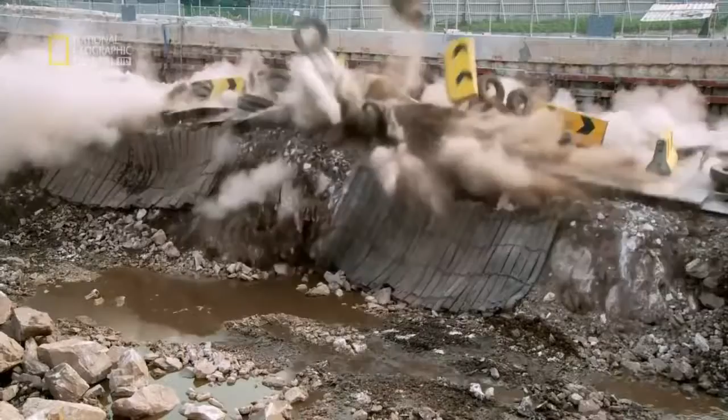Now there's an ambitious solution: a new transit system that will crisscross not only the city, but the entire region of Greater Kuala Lumpur. Huge machines will bore into Kuala Lumpur's treacherous bedrock to carve out almost 20 kilometers of tunnel. Every day of construction, the engineers confront the perils of mechanical failure, fire, and collapse. Get it wrong and billions of dollars of investment could go to waste, and the streets of Kuala Lumpur and its pent-up economy will stay trapped in gridlock.

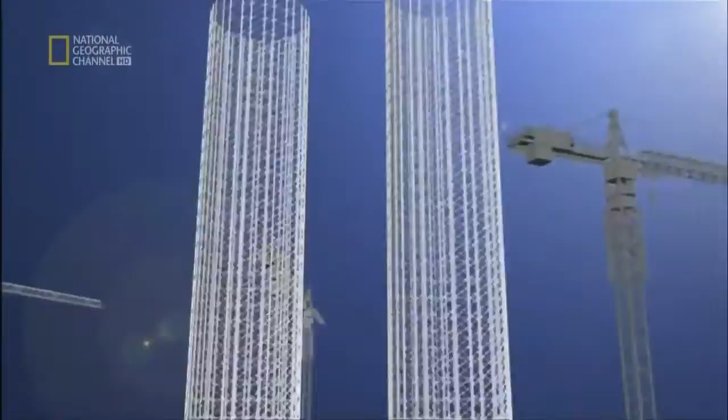Kuala Lumpur is one of Asia's most vibrant cities. It's looking to compete with the region's Asian tiger economies. Its magnificent skyline testifies to its soaring ambition. But at street level, it's a different story. The city is blighted by severe congestion that threatens its future growth.

Over 7 million people live and work in the Kuala Lumpur region, the Klang Valley. Every day, they head into town in 4 million cars. As an alternative, a light rail transit system was built. But over time, it has been overwhelmed, and connections are inadequate.

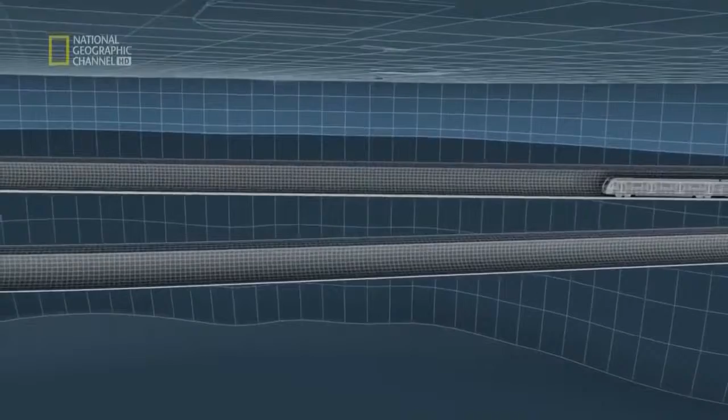Now there's a solution, a new mass rapid transit system that will reduce the pressure on traffic and unite far-flung parts of the city. For any modern metropolis to be vibrant, to be competitive, to be on par with some of the leading cities in the world, you've got to have a modern public transport system.

The Klang Valley Mass Rapid Transit System, the KVMRT, is Kuala Lumpur's bid for greatness. 3 different routes comprising more than 150 kilometers of brand new lines. It will be seamless travel around the Klang Valley, especially the areas of high concentration population.

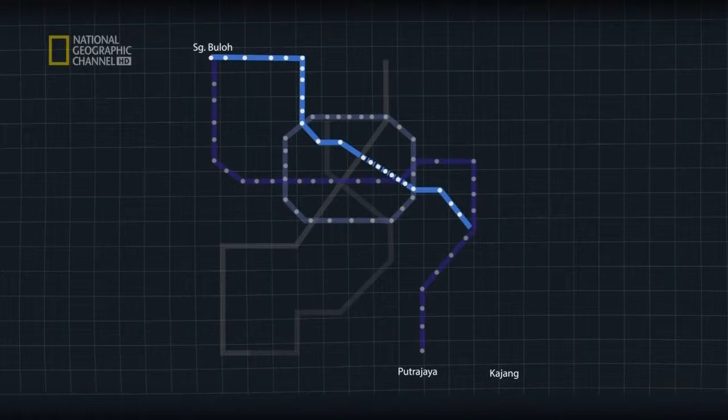And the first stage of the plan is the biggest test of all. This is the Sungai Buloh Kajang line. It will stretch 51 kilometers with 31 new stations. A fifth of the new line will have to be constructed underground. To do this, 10 giant tunnel boring machines, or TBMs, will be brought to Kuala Lumpur and set to work.

These mighty engines do much more than burrow through rock, astonishing though that process is. As the huge drill crunches forward, the back end constructs the tough tunnel frame with high-strength concrete.

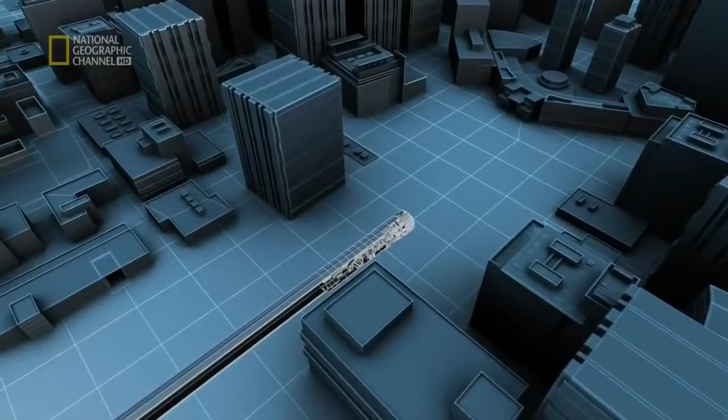In charge of this massive operation is engineering veteran Satpal Bogal. Most cities now, for railway mass transit systems, the tunnels are built using TBMs because of safety issues and because of ground conditions. The underground section of the new MRT will be a perilous undertaking.

For beneath Kuala Lumpur is a formidable engineering challenge. Below the city are 2 very different kinds of rock, and the TBMs will have to deal with both. The western area is known as Kenny Hill, and the eastern area as the Kuala Lumpur limestone. Imagine the difference between a Dutch Edam and a Swiss cheese riddled with holes.

Dr. Ooi Lean Hock is the project geologist and expert on Kuala Lumpur's underground world. I got this Dutch Edam cheese here. As you can see, this whole piece of cheese is fairly homogeneous, very tight. And Kenny Hill, when it's bedded, it looks something like this. This is like the KL limestone. All right, this is Swiss cheese.

As you can see, there are a lot of cavities and voids inside the cheese. These voids can be transmitted all the way to the other side of the cheese. Things can move in from one hole to another hole, and it may come in vertically and go out laterally.

The most formidable challenge lies beneath the eastern areas of Kuala Lumpur, which rest on a huge slab of limestone. Over millions of years, torrents of acidic rainwater have eaten away the layers of rock to sculpt a hidden landscape of pinnacles, cavities, interconnected passageways, and colossal caves.

Around me here on my left is a surface karst, or a limestone hill, you can say. Now imagine when we are underground and all these are covered with soil, it is totally a different ball game. So when you tunnel through this kind of material, there are a lot of unforeseen circumstances which would be a nightmare for tunneling.

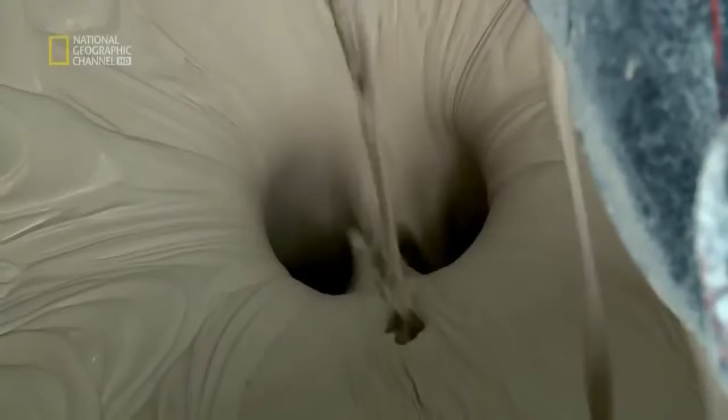This is the worst nightmare of all. The drill head hits weak cavities and the rock caves in on the cutter head. The solution is this stuff, slurry. At the head of the drill is a high-pressure chamber that injects a liquid called bentonite slurry into the cavities before they can collapse.

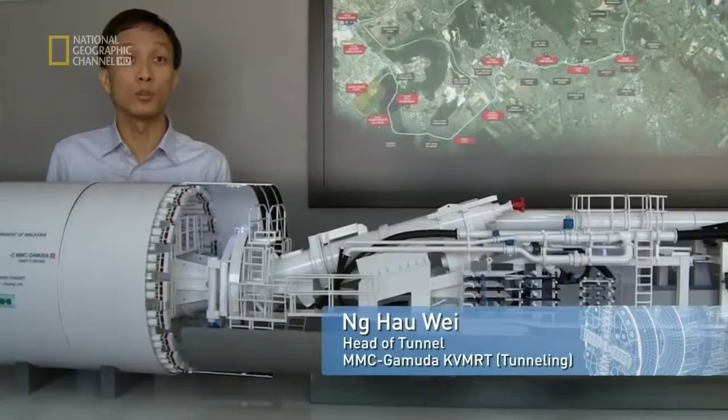This ingenious system was used by the engineers who built the Smart Tunnel in Kuala Lumpur, the world's first combined storm and traffic tunnel. But builders learned some hard lessons about slurry. Ng Hau Wei was a rookie engineer on this project. We have the best machines in the world in the SMART project, but we still do have some problems.

What Ng and the engineering team found, to their cost, was that the slurry they injected into the limestone cavities could escape into surrounding rocks and cause havoc, bursting from the ground like a geyser or creating sinkholes at the surface that might suck in people, cars, or buildings.

Today, Ng heads the tunnel team building Kuala Lumpur's MRT system. And this time, he had to find a solution to the uncontrollable slurry problem.

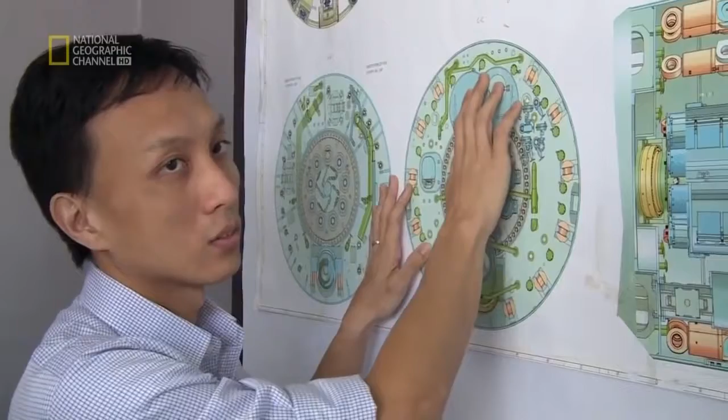Working with German company Herrenknecht, Ng and the team of engineers have come up with a revolutionary kind of machine. We throw in all the ideas, we have brainstorming sessions, we consult a lot of experts, we have to do a lot of research because no machine has been designed like this before.

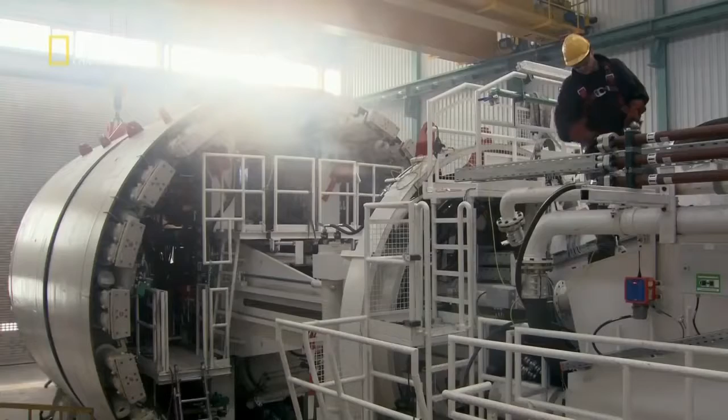From these brainstorming sessions was born this mighty machine. Called the Variable Density Machine, it's the state-of-the-art tunneler. For the first time, a TBM can control the consistency of the slurry and take on whatever Kuala Lumpur's underground throws at it. Even the construction of this revolutionary machine is on an epic scale.

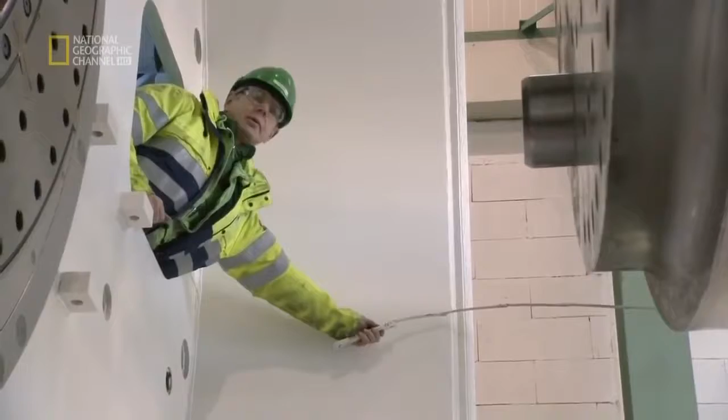Components are brought from all over Europe to be assembled inside the massive factory in Schwanau in Germany and other Herrenknecht plants in China. One machine like this is fiddled together, you can say the machine is fiddled together with about 40,000 pieces one by one.

The design starts screw by screw, piece by piece, and this is brought together with all our 400 engineers. They do all these works to come to this level, what you can see today.

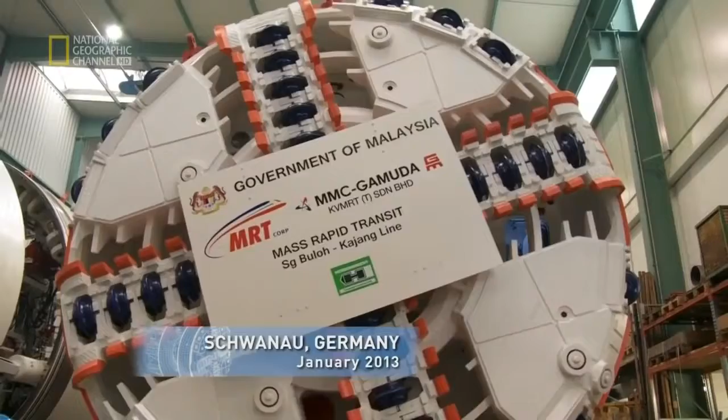It takes 9 months to manufacture the revolutionary TBM. Today, it's ready to be put through its paces. We have only seen it on the drawing board so far. So this is the first time that it is all put together.

Everything is running, so we can check every equipment, including the cutter heads, the hydraulics, the safety features. This is the last chance for us to make final modifications before we send it to the site and put it in the ground.

As the engineers work on the TBMs in Germany, work gets underway in Kuala Lumpur. The engineering company in charge of tunneling, MMC Gamuda KVMRT, must complete the job in 24 months and with minimum disruption to the city above.

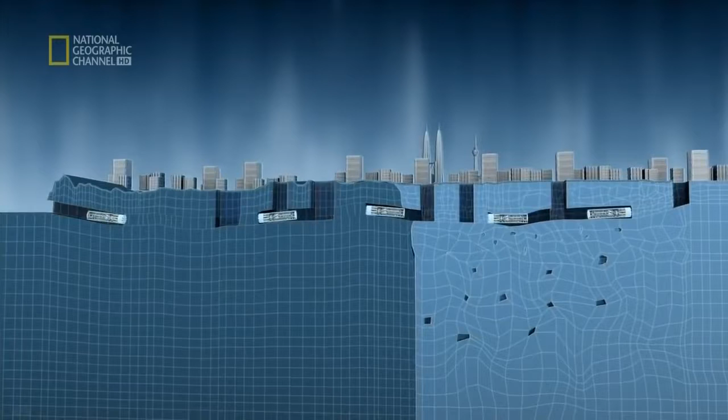The operation is conceived on a military scale and with military precision. The TBMs will be launched from 4 different staging zones along the planned route of the underground section of the MRT. At the western end of the tunnel, the elevated section of the MRT begins its descent underground from the surface. But at the 3 other zones, shafts must be excavated so that the different TBMs can be put to work beneath the city. Eventually, the different sections of the 9.5-kilometer tunnel must all link together.

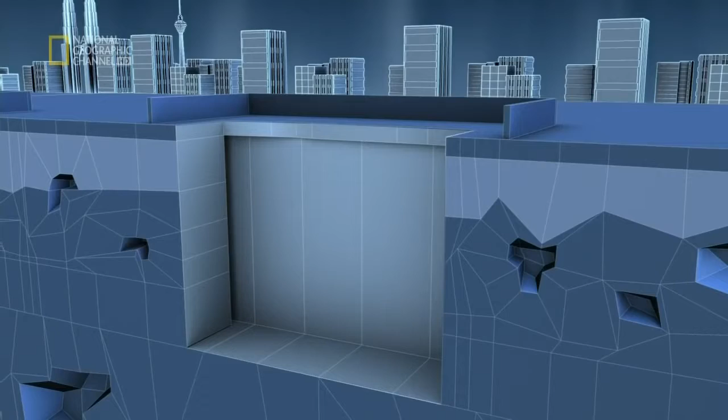Since July 2011, work on Kuala Lumpur's new MRT starts here at the Cochrane site. It must be dug out to a depth of 30 meters before 4 TBMs can be deployed. The huge staging zones will be blasted out of the ground.

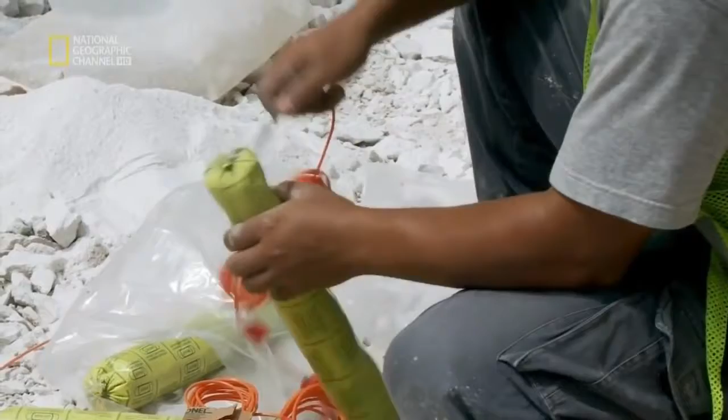We have short time to meet our requirements, so we are working with frequent blasts, more than 2 or 3 blasts a day. The blasting must be carried out with rigorous precision, especially in a city as dense as Kuala Lumpur. So when you talk about blasting itself, it's dangerous.

You can see we've been surrounded by high-rise buildings. Now at the moment you're using about 150 to 200 kg. So that can bring a 10-story building down.

The solution is to sequence each blast, creating a pressure wave that, in theory, won't damage surrounding buildings. These are the basic things we use. My hand now is explosive, which will be charged to the detonators over here, and it will be connected one at a time, and finally we have delays. This will segregate the blasting rather than at one go.

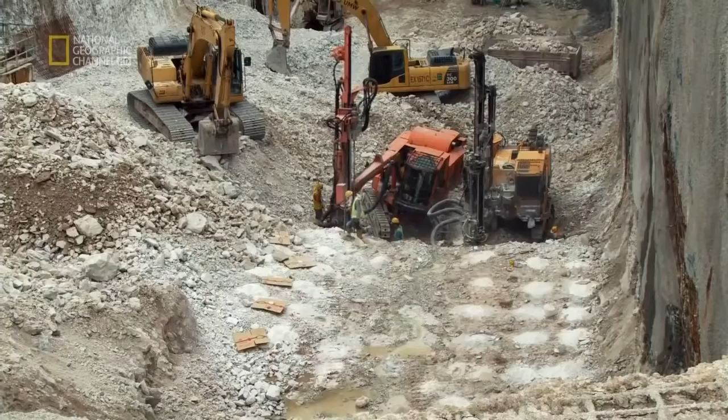Engineers dig rows of holes between 3 to 6 meters deep. Then the explosive charge is inserted inside with a detonator. These are connected to a central command point. But nothing is left to chance. Giant barriers of steel plates, truck tires, and concrete prevent debris flying from the site. The charges are set.

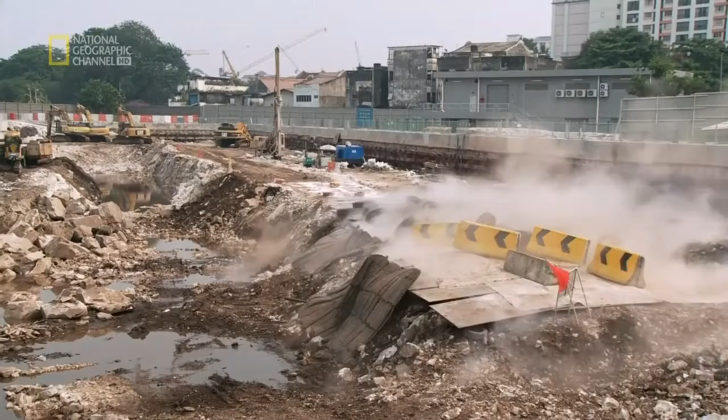The engineers have got the right formula, and the surrounding buildings are safe. The blasting continues at the Cochrane site for 7 explosive months. Enough rock and soil to fill 50 Olympic-sized swimming pools is blown out of the ground. And finally, the site is ready to receive the first TBM.

Its code name, 774. At the beginning of 2013, the first new model arrives in Kuala Lumpur. The giant machine is transported in parts to the Cochrane site on huge lorries.

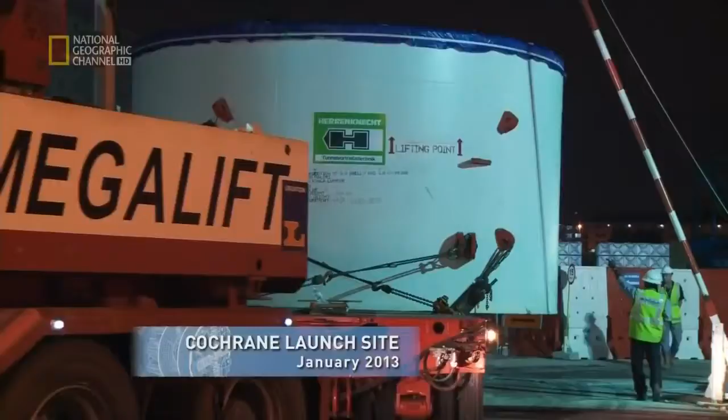But that's the simple part. Now the 160-ton monster must be lowered into the excavated shaft so that they can start chewing into bedrock. To lift it 30 meters down the shaft, we have to be very careful. Anything can go wrong and then we are stuck. It will push back the whole project completion by a lot.

At the site, everyone is holding their breath as the TBM begins its descent underground.

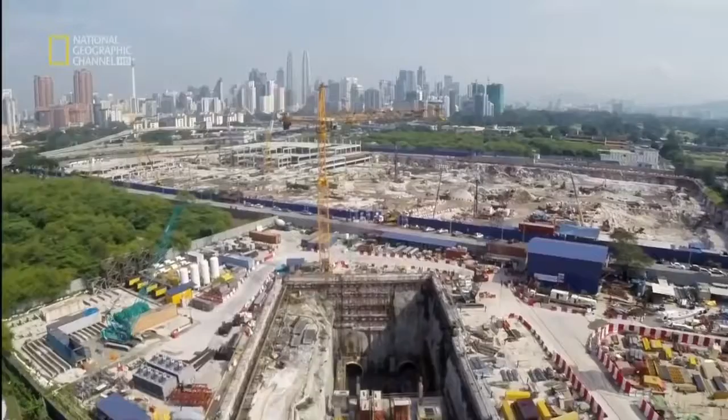Malaysia's capital, Kuala Lumpur, is being transformed into a huge building site. A new MRT system is under construction. Close to 10 kilometers will be built beneath the city, and a revolutionary new tunnel boring machine, or TBM, is brought from Germany. The first to be sent into action weighs 160 tons and has to be delicately lowered 30 meters to the tunnel entrance.

The man in charge of the tunnel operation is Ng Hao Wei. He won his spurs building Kuala Lumpur's famous Smart Tunnel. We are dealing with very delicate components, and we cannot afford to damage it. If the extent of damage is huge, then the impact to the project will be tremendous.

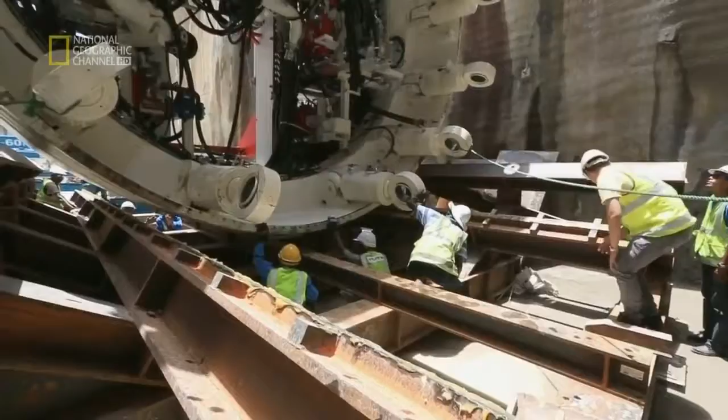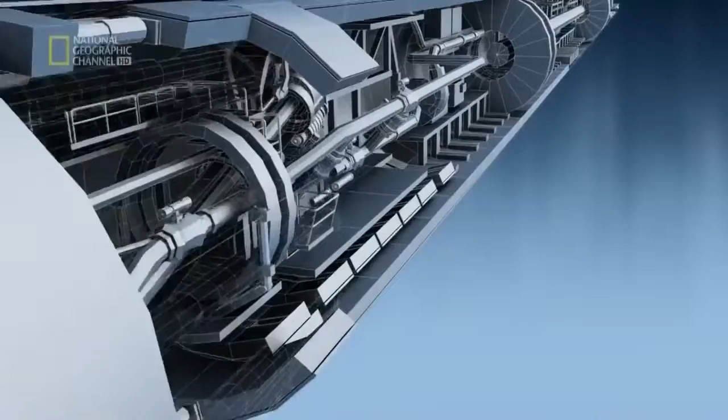This is literally the cutting edge, the business end of the huge machine. The circular cutter head weighs 70 tons with 37 tungsten carbide cutting discs, which are stiffer than steel and denser than titanium. The entire TBM is 135 meters long, almost double the length of a 747 jet airliner. Each TBM has 10 interconnected gantries to support the operation.

Only 3/4 of the shaft has so far been excavated, so the monster machine has to be assembled in sections. We assemble up to the 6th gantry, which will give us the key components of hydraulics and electrics, so we can start to launch the machine, at the same time give sufficient space for the shaft excavation to go on. It takes just under 3 months for the TBM to be assembled.

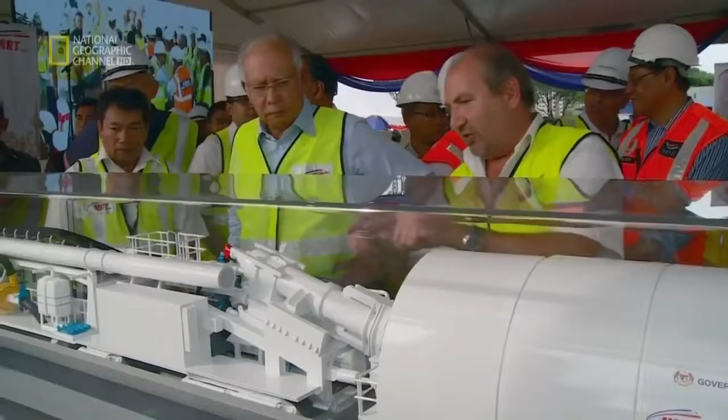The Prime Minister of Malaysia launches the very first variable density TBM. It's actually a technological marvel, and it goes to show that, in partnership with a German company, Malaysians can offer a lot of our technical guidance and advice. This is something that we can be really proud of.

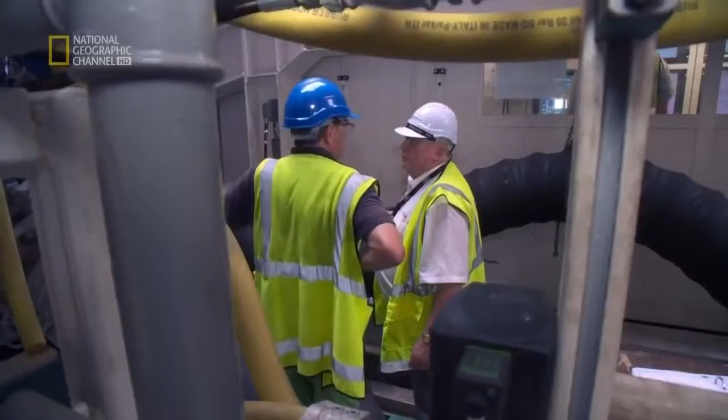One day later, Ng Hao Wei and his mentor Gustav Klados arrived to check on the machine's progress. Gus, a veteran Hungarian tunneler, has worked on some of the biggest tunneling projects in the world, including the Channel Tunnel linking Britain and France, and the Smart Tunnel here in Kuala Lumpur. This tunnel warrior is the team's project manager and is thrilled to be working back in the city on the new machine.

It's uncharted territory. We are trying out something totally new. A lot of people at the beginning said, no, it won't work. But now it is excavating. You can hear the stones moving around in the pipe, so it's a fantastic noise. It's my favorite. Much better than in the office.

It's not just the machines that will need breaking in. The giant TBMs must be served by an army of workers, day and night, week after week, month after month.

I'm new here, but I try to make my best every day. Everybody starts as new. Trust me. Me too, I did start as a new guy. My first job was to go and count the number of nails and bolts and nuts in the stores. I went there and literally counted them for a week. When I finished, I went to the storekeeper and he told me that we usually use a scale.

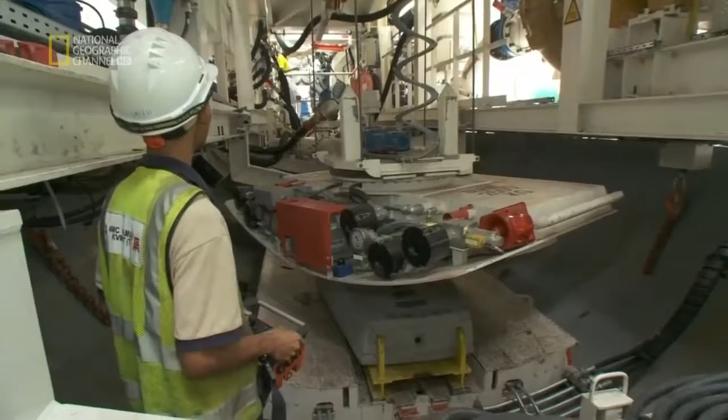The MRT tunneling project will need thousands of workers over the 2-year period of construction, and MMC Gamuda set up an academy to train the hundreds of workers needed to finish the tunnel on time.

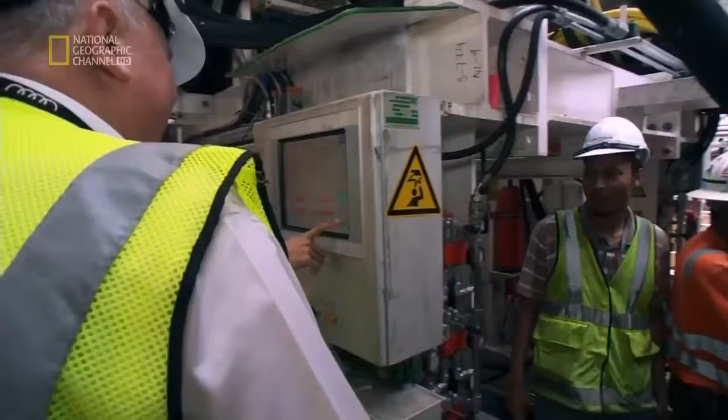Veteran or newcomer, the team faces a daily avalanche of problems, and right now, the problem is pretty basic. The TBM is just not picking up speed. 8 millimeters a minute, not very fast. But it's all right.

At this pace of tunneling, the project will take 4 years longer than expected and run millions of dollars over budget.

Veteran engineer Gus Klados hopes that the giant machine will soon pick up speed. In the next few months, it's just a matter of breaking in the machine like a horse which has never been ridden before. And I am convinced that we will make it work.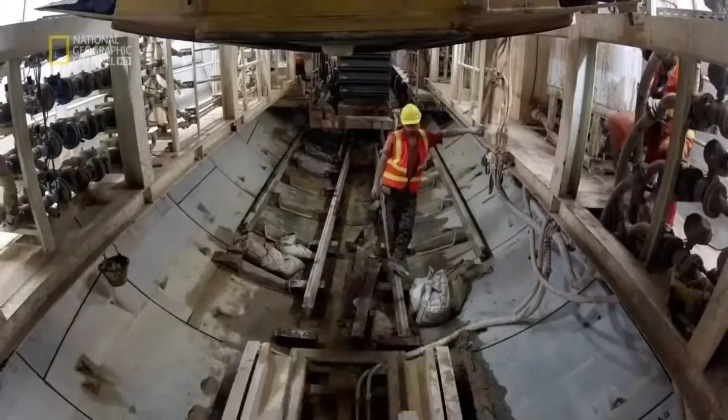The team is under pressure to complete the tunneling works on time. In the tunnels, the TBMs never stop mining. It's a 24-hour operation. And 3 weeks since mining began, the giant machine has at last picked up speed.

The TBM is like a huge underground factory, drilling, building, and spewing out waste. The heart of the entire operation is in this tiny space.

So what's happening? Pressure sensor number 4 has a broken wire. The control cabin means the heart, the control center of the TBM where everything is controlled.

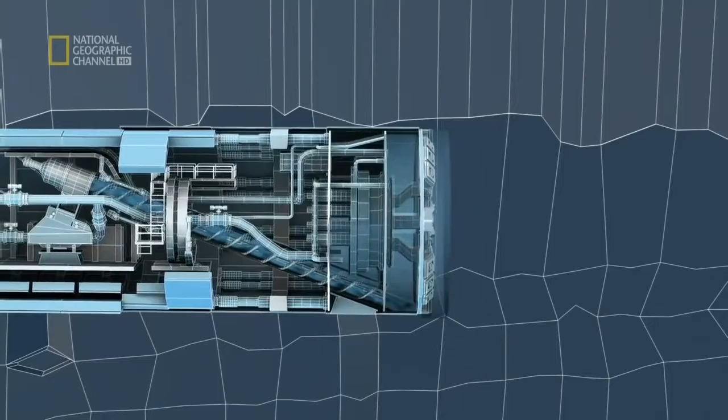If you're building a skyscraper, visibility is not normally a problem. But underground, it's a different story. You can't see through rock. So to give the TBM underground eyes, the machine is equipped with arrays of sophisticated sensors. It's like working in a submarine. You have to depend on the sensors, you have to depend on communications, you have to depend on eyes. Other than yourself, you can't see anything.

Inside the control cabin, engineers can work out with absolute precision the real-time position of the TBM, calculate changes of direction, and when to start lining the tunnel wall.

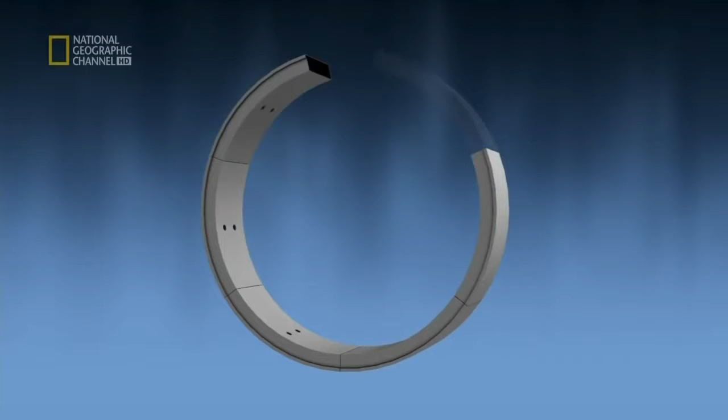After mining about 1.4 meters, we build the segment piece by piece and build them up like a jigsaw puzzle. These tunnel rings are made from 7 segments plus 1 keystone that holds everything together.

The concrete wall segments can withstand extreme pressure 30 meters underground. All day long, concrete segments arrive at the TBM. Each segment weighs 2.2 metric tons.

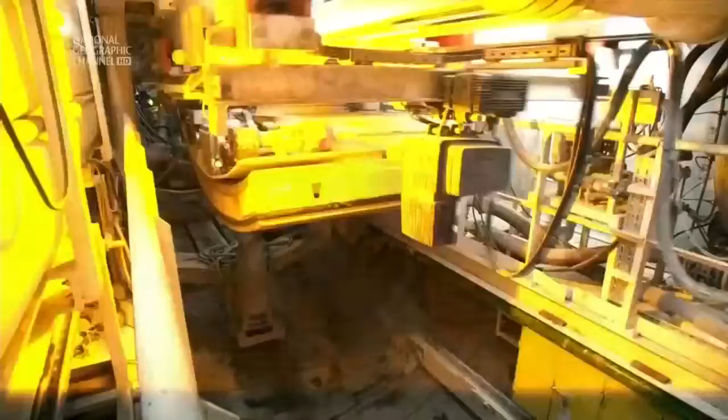Giant hydraulic arms swing the segments into place using the TBM's vacuum erector, which uses the power of suction to raise and position each segment.

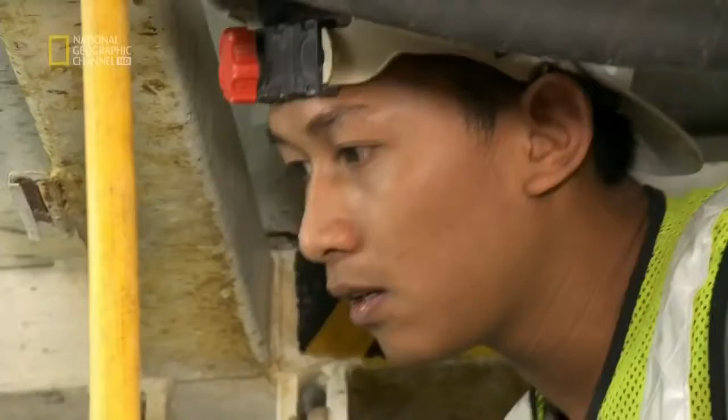Precision is essential. If any one of these segments is wrongly positioned, the consequences would be catastrophic. So it's very important to drum into the ring building team that they have to build it to the required tolerance of a few millimeters. If we are out of tolerance, water will find its way to seep through and we'll have a great problem to seal it up.

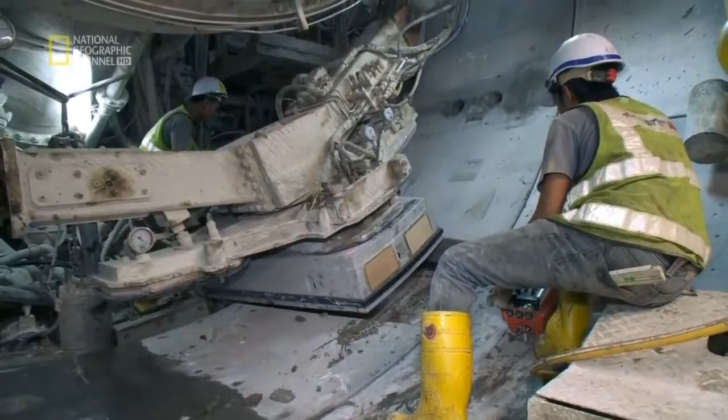Over time, as graduates of the Tunnel Training Academy get more experience, the process builds up momentum. In the first week, the teams managed to place just 3 rings a day. 3 months in, and the rate is 5 times higher.

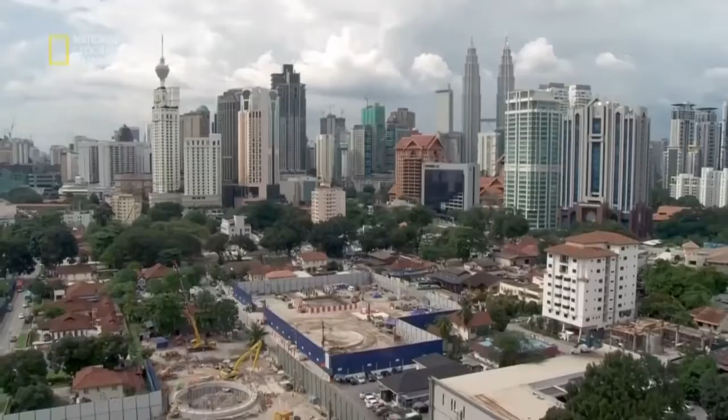The campaign to excavate Kuala Lumpur's new MRT tunnels is about to enter a more intense phase. By November 2013, 4 TBMs have been successfully launched from the Cochrane site. But at another launch site near Inai Road, the engineers have run into difficulties.

Here, 2 circular shafts are being excavated to 30 and 45 meters in depth. But as the shafts are blasted out of the ground, disaster strikes.

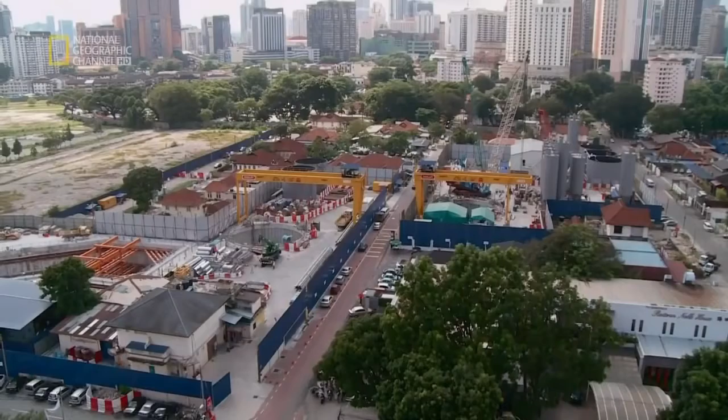The hole in the garden is frightening enough, but the condition of Mr. Jamal's home is even more alarming. Floors dip and cracks ripple up walls and across ceilings. The family home is falling apart.

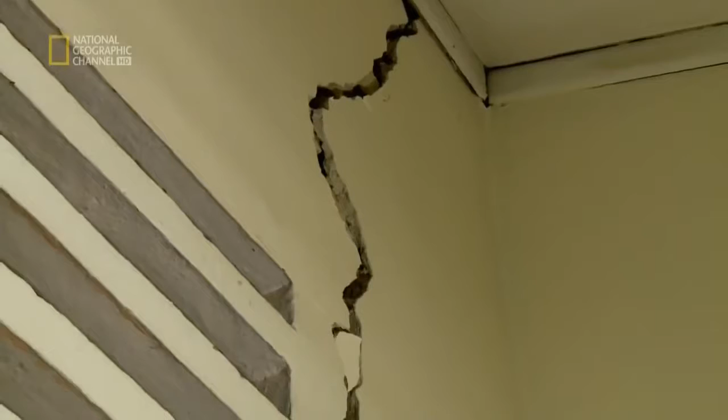Terrified, Mr. Jamal calls the company in charge of the MRT project. When inspectors see the condition of his home, they make an immediate decision to move the family out. Engineers now need to explain what has gone wrong and whether other homes are at risk.

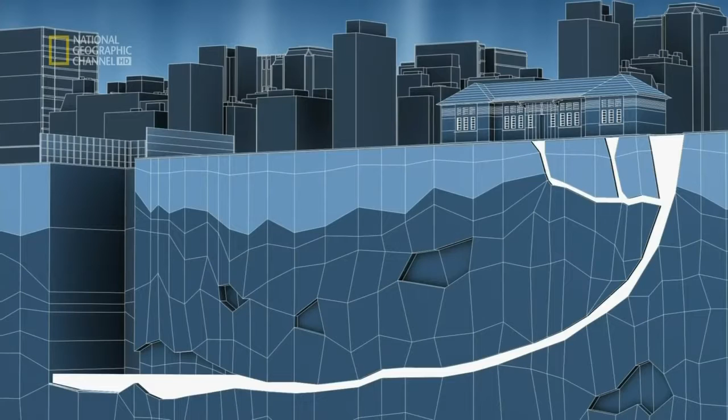In limestone, what happened is that the solution features can be connected laterally and vertically. What happened is we drill a shaft, and this hits a connection. When there's a hole, it's like a pipe culvert. If you have a culvert connecting from the shaft to underneath Mr. Jamal's house, that forms a very easy flow passage of water, bringing the soil from underneath Jamal's house into the shaft. And that results in sinkholes.

And it's not only Mr. Jamal's house that's in danger. Water is pouring in from the walls in the deeper of the 2 Inai shafts.

It's unstoppable, and the situation is a tough call for project director Satpal Bogal. We couldn't stem it, and the decision was taken to backfill it for safety. That decision then followed on to other changes to the program.

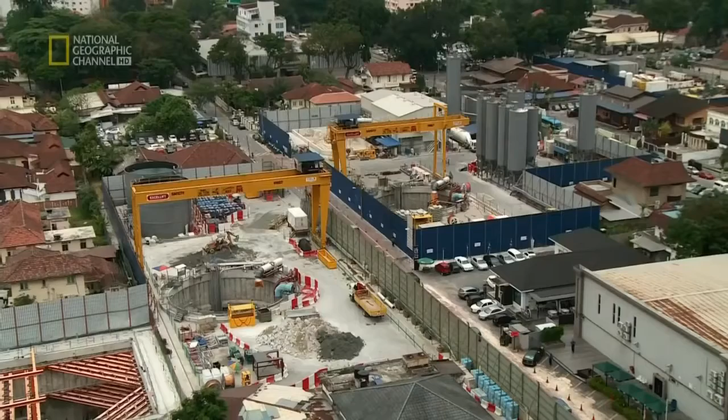Abandoning one of the two Inai shafts is a huge setback. Now only one TBM can be launched from here, which means a new strategy has to be devised. The first TBM brought to Malaysia, 774, which has been mining from the Cochrane site, must now make up the difference and tunnel more than twice the distance. It will put the complex machine under severe strain.

It's not only flooding that makes the Inai launch site such a headache for the engineers, it's also a very tight fit compared to the other launch sites.

Tunnel engineer Aslan Marzuki is in charge of getting the huge TBM to the bottom of the shaft. It's a smaller shaft, not a square, it's a circle. That saves space, but that means our launching is going to be staggered.

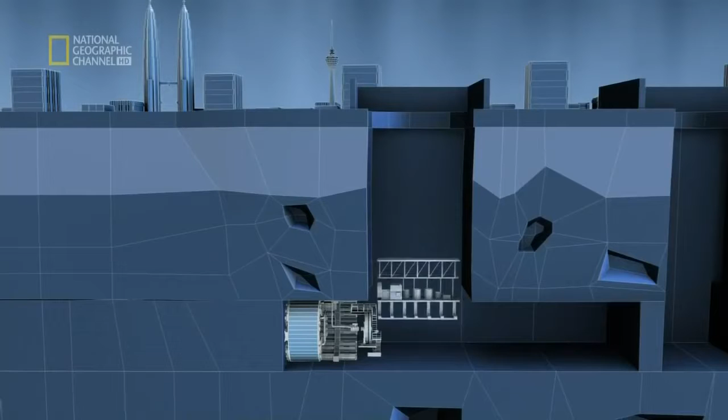The team will blast out tunnels on both sides of the shaft. Then the front section of the TBM is inserted. Next, three out of the ten gantries will be lowered one by one, followed by the giant screw. The problem is that the 18-meter screw segment is longer than the width of the shaft.

Behind me, this is our biggest component that's going to be lowered down. It's the most difficult one because this length is actually bigger than the shaft itself. The solution is simple, but risky.

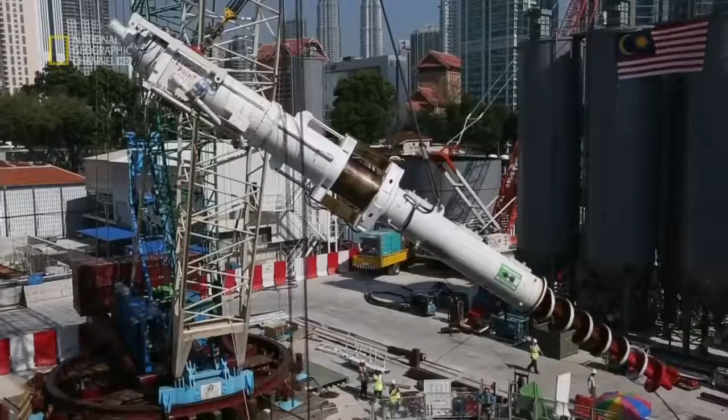The screw segment of the TBM will have to be lowered into the shaft at an angle. We have to tilt the screw conveyor at a 56 degree angle. You have to use a chain block, a hand winch to pull the machine upwards. It sounds simple, but that giant screw weighs a whopping 15 tons, and any deviation from that critical angle would be catastrophic.

At the bottom of the shaft, the engineers face another challenge: the angle of descent has to be lowered. It's another fiddly maneuver with a lot of complicated machinery at stake.

When you lower it down, the final angle is 15 degrees. Down there, you still have to do the same exercise again, but it has to be a slow process. After two hours, the screw conveyor is finally in place.

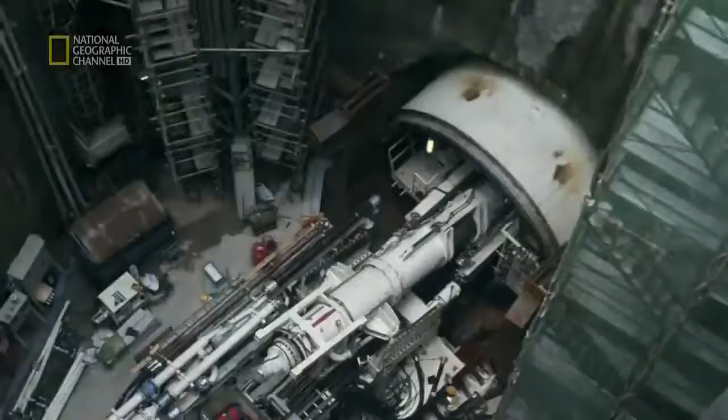It takes three months of hard slog to put the TBM together, but at last it can begin burrowing into the limestone. This underworld is packed with hidden dangers. Like Swiss cheese, the rock is riddled with cavities that could wreck the multi-million-dollar boring machine.

When you're tunneling this way and you have a cave directly underneath your cutter, and it's big enough that you cannot develop a face support, the thing just dips inside. In that situation, we are snookered. It will take us months to recover, to bring that TBM cutter face into operation again.

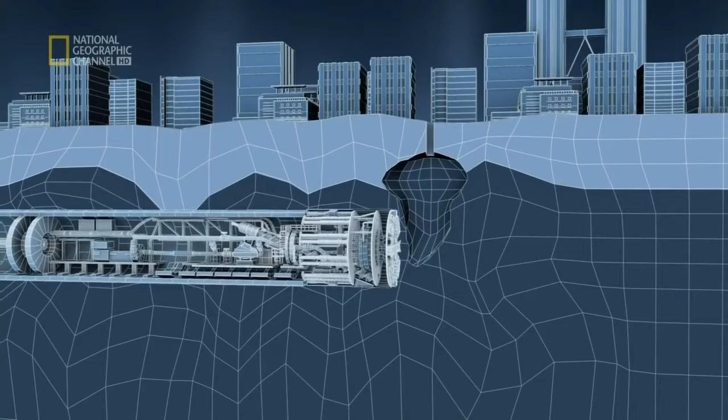As the huge drill edges forward at 14 meters a day, an army of engineers is busy scouting the perils that lie ahead. They drill hundreds of boreholes into the layers of rock. Once a cavity is detected, concrete is poured into the hole to shore it up. It's a process called grouting.

If we do encounter such a thing, then we'll do a lot of compaction grouting to fill up this void, like you go to a dentist to fill up your cavity, to ensure that when we are tunneling through, the TBM can go through safely.

But some cavities can be less than a meter wide. These are much harder to fill, but still pose a threat. There's no way we can pick it up. We are unable to treat all these features along our tunnel alignment. So what we then need is a machine that can cater for all these little challenges.

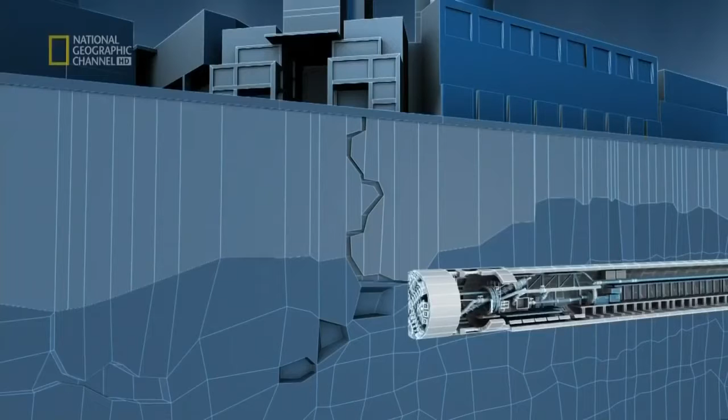Enter the new breed of tunnel boring machines. Behind the drill, a sealed high-pressure chamber is pumped full of liquid called bentonite slurry. Unlike previous models, the new TBMs can control the density of this thick gray liquid, changing the consistency from a thin watery liquid to a thicker honey-like substance. The thicker slurry is used to fill these hidden cavities, and its density prevents it escaping through the porous rock to the surface.

The machine is able to operate in different modes at the flip of a button or switch. So in situations where we have major loss of slurry, we can switch to a thicker density, a kind of paste that chokes up the system, and then we can mine through very easily. The revolutionary new tunneling system soon proves to be a success.

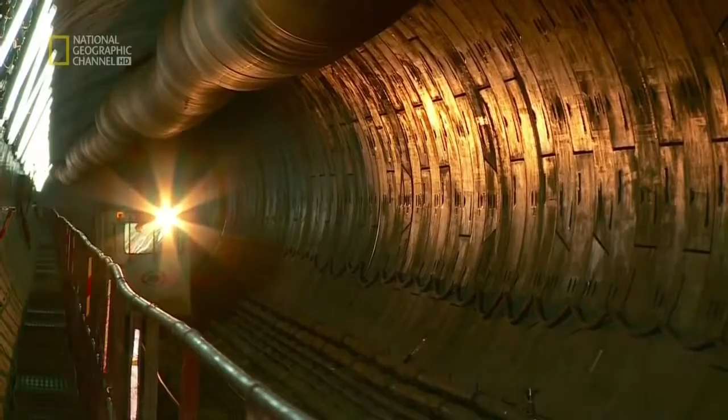But there is a problem that all tunnel engineers fear at the back of their minds: fire, every tunneler's nightmare. For engineers excavating Kuala Lumpur's new MRT system, the most terrifying scenario is a fire in the tunnel. A blaze can suck oxygen from the air in seconds. Workers can suffocate with terrifying speed, and the tunnel itself works like an oven, insulating the environment and ramping up temperatures to deadly levels.

Tunnel workers must be ready to react at any moment, and training exercises are made as real as possible. Christopher Fenton, Head of Safety, Health and Environment for the Underground, is training the company's emergency rescue team.

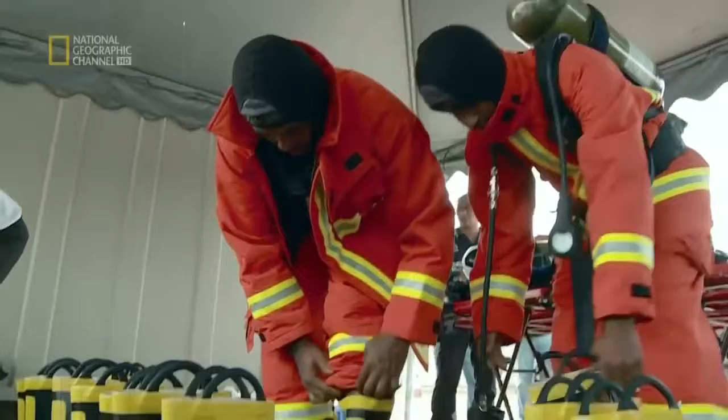Tunnels are very dangerous during construction. Fire is the last thing we want, and we need to be able to respond to it very quickly if it did happen. He has brought in two fire experts from the Los Angeles Fire Department to help with the training. We can go in here and create real live fire scenarios, and we can actually see those real live smoke conditions, whether it's good smoke that we can go in and find the seat of the fire and put it out, or conditions so bad that we have to exit.

The men and women gear up. Anytime you see your neighbor confused or disoriented, you speak up. Tell me or another instructor, and we will fix it. Okay? Everybody good? Thumbs up. The calm smoke like this is lazy, sleepy. Okay, go in.

Tunnel fires can reach temperatures above 800 degrees Celsius, and in a tunnel, there's nowhere to run. When we see an upside-down boiling pot of soup, like angry, those gases are going to ignite. All firefighters dread a moment they call flashover, when a blaze turns into an inferno. A flashover means get out now. We gotta go!

The exercise proves too challenging for some. Extremely hot, like being in a torture chamber, but it was good, a very, very good experience. It was dark, it was hot. It's very hard to describe, but you have to be able to keep a cool and calm mind. Now they know what to expect. They're better than they were before. Yep, so we're good.

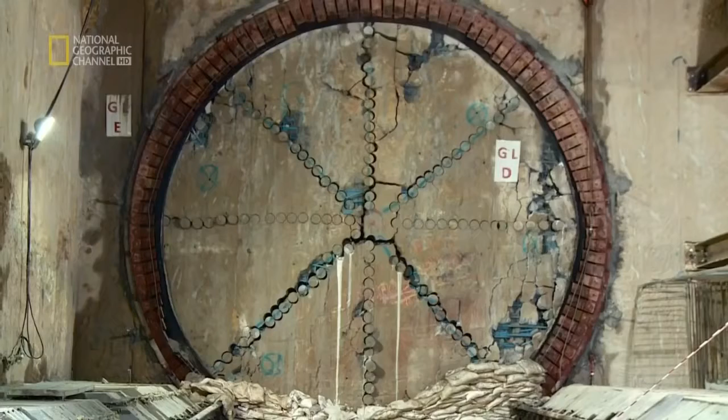It's an anxious wait for tunnel manager Chin Raymond. I told him if it doesn't come in the middle, it has to jump off a cliff somewhere. After drilling for 6 months, the TBM punches through right on target. Congratulations. Thank you, boss. Well done, man. Okay, good, yes, great. Finally, I pushed my machine, it came in. I've been working for more than 24 hours. I can have a good rest to enjoy my Christmas.

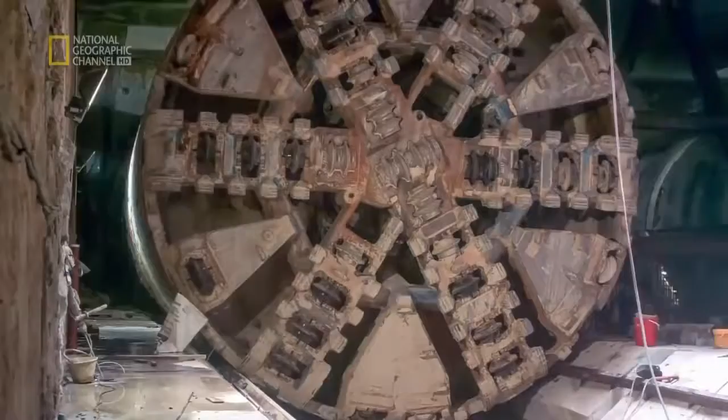But the machines don't get a holiday. As soon as the TBM completes its breakthrough, it is hauled into position to begin work on the tunnel that will link Museum Negara to the next station. The TBM is now burrowing beneath the historical heart of Kuala Lumpur.

The Museum Negara is a repository of the nation's history and culture. Its facade is lined with precious mosaics. Further along the path of the excavation is the old railway station, an icon of the past that stood the test of time. But can it withstand the mighty TBM as it threads its way nearby?

We were stuck with having to cross under some sensitive structures, and the ground settlement would affect the existing structures. If there's too much ground settlement, the buildings could collapse.

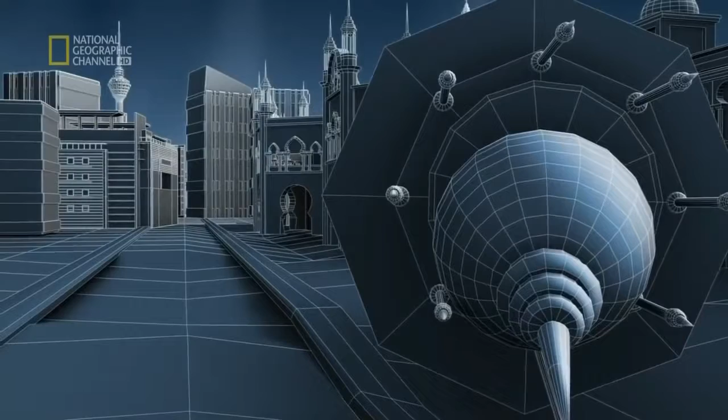For the old building, we had to pay much more extra care because we don't know how good the structure is, don't know how good this building foundation is. So we had to take extra precaution on that.

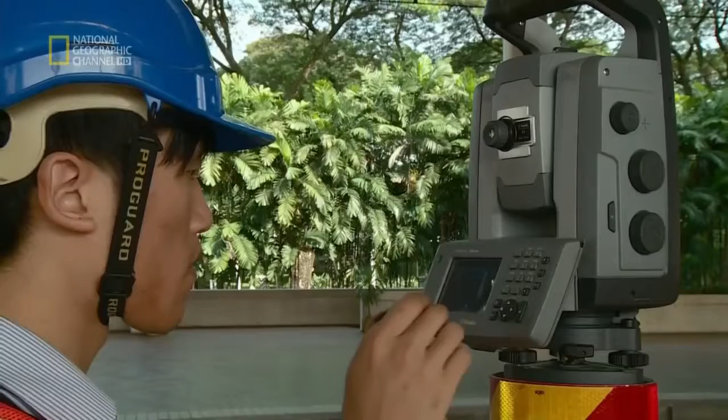A team of surveyors now equip these venerable buildings with highly sensitive sensors that monitor every vibration. As the TBM approaches, Tae Chi Yong and his team nervously carry out hourly tests to monitor the old buildings. The TBM is directly below this building. We get to monitor the effects and impact of our TBM drive on the structures above, on the surface above. It's a nail-biting 5 months of constant monitoring as the TBMs negotiate this historic region. At last, the TBMs inch past. The iconic buildings are safe.

The most powerful man in the world is coming to Kuala Lumpur. All eyes are on Malaysia.

While the people of Kuala Lumpur get used to living and working in a massive work site, where giant boring machines gnaw away at the city's bedrock to build a new MRT, the President of the United States will be descending on Malaysia in 3 days' time.

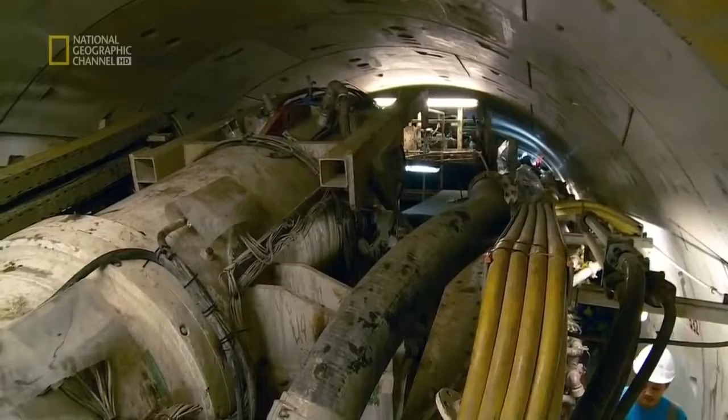All is not well with TBM 774. Located less than 400 meters from Obama's planned accommodation, the TBM gets a bad case of indigestion and is unable to process the waste from the cutter head. It has come to a halt.

Directly above the TBM, a team is tasked with monitoring road surfaces to look for any signs of trouble. Called the Bull Gang, it is led by Michael Poon. We have a team of people patrolling 24 hours. We have to check on the surface.

This morning I walked by, I saw some settlement. It's just a small depression. I can see the hole, it's quite deep. At the surface, the cracks don't seem to pose much of a threat.

But like icebergs, most of the danger is hidden. Down there is a void big enough to fit an electric car. We have an unscheduled stop. They have to lower all the slurry. That means the face support is affected, and that causes a depression or a sinkhole in front of the cutter face.

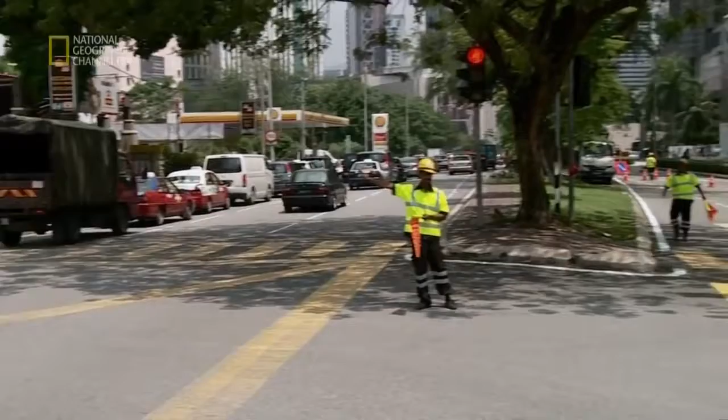An emergency response team reacts immediately. The road is closed to traffic. Then we decide to order mortar to fill up the hole. The hole is quickly filled with 5 cement trucks of concrete, and frantic repair works continue inside TBM 774.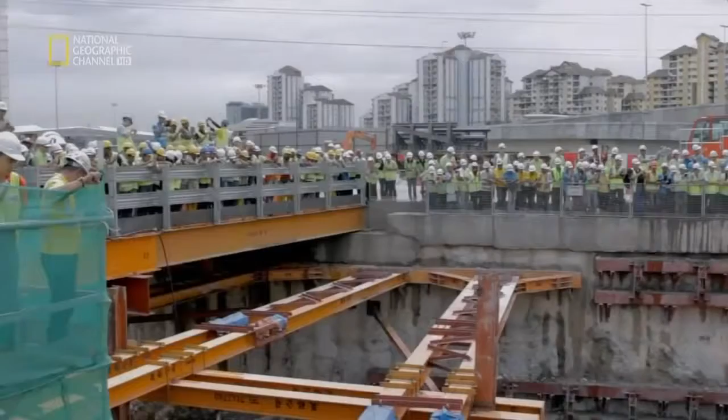Across town, there is reason to celebrate. The 5th breakthrough of the project will take place today. It's a landmark moment. It means that 50% of the tunnel has been completed.

Every breakthrough is like landing a plane, right? Once you're there, you feel great because you brought home the TBM. The breakthrough, I thought it was very exciting. Now we've finished everything, it's very, very good. I'm very content with the progress as well. The quality of the tunnel linings, the precast concrete inside, is one of the best.

We work as a team. We work night and day, blood and sweat, hard time, good time. This is the prize for all the crew. This is like a present.

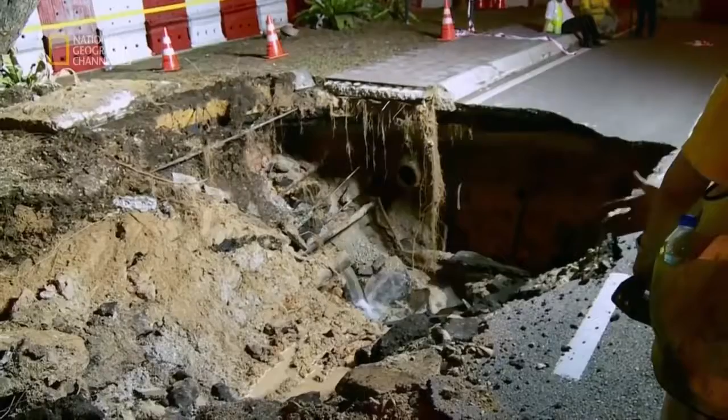But the celebrations are short-lived. As TBM 774 finally starts mining again, President Obama arrives in Kuala Lumpur. But to the horror of the team, another collapse occurs just meters away from the earlier sinkhole as the president is at the official state dinner.

This new sinkhole is an even bigger problem than the previous one. Ground movement has broken water pipes, and the hole is filled with live power cables.

President Obama is living nearby. We definitely do not want to cut off water and power to where Mr. Obama is living, obviously. So we're trying to get this done in the quickest time possible.

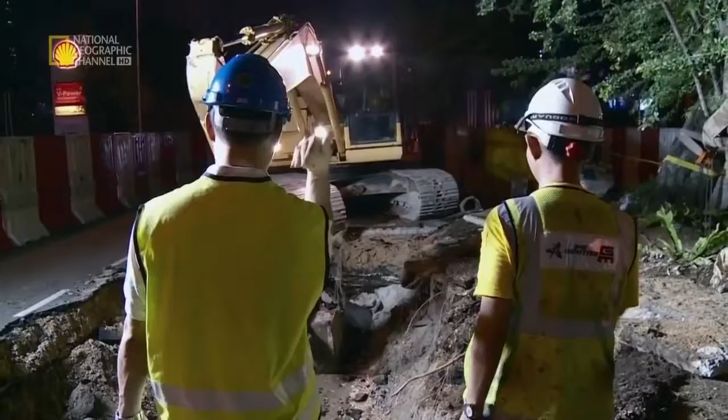Racing against time, the Bull Gang takes 5 hours to repair water pipes and fill the hole. As they work into the night, President Obama and his entourage are blissfully unaware of the battle being fought less than 400 meters from their hotel.

TBM 774 is now approaching the zone where the underground geology changes from the karstic limestone to the Kenny Hill Formation, from Swiss cheese to Edam. We are going through a very distinct change in ground conditions.

In normal cases, you would need to use 2 different types of machines, and you would need another launch shaft to do this. It will take months. But the new variable density TBMs can be retooled underground.

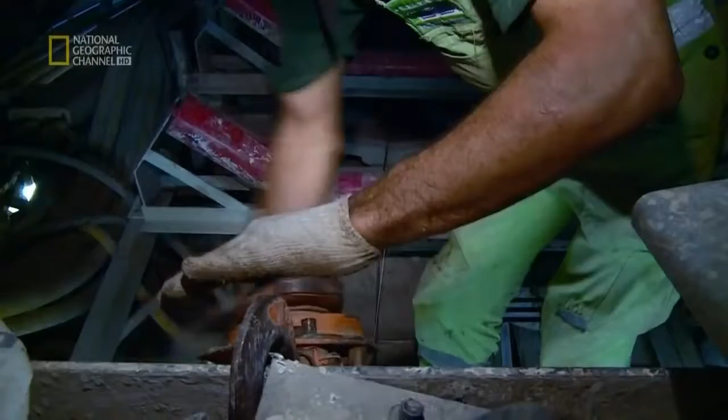It's a matter of changing the way waste is extracted. Instead of extracting through pipes, it needs to be removed with a system of conveyor belts right to the end of the gantries onto these so-called muck cars.

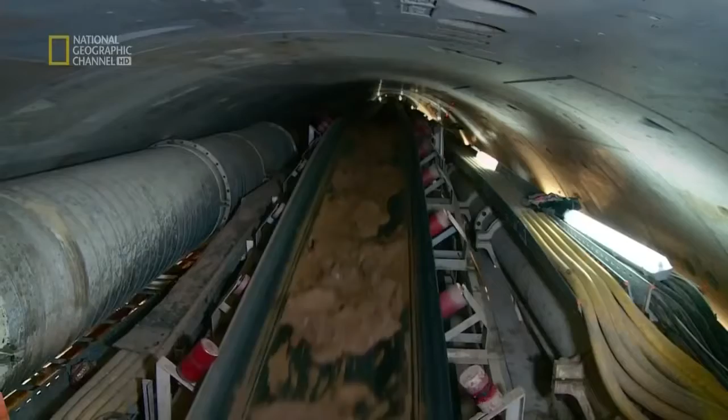The conversion takes one week to complete, but it's a much smoother process than the older system.

But a much bigger hurdle awaits the TBM 774: an underground tangle of steel wires that could bring it to a standstill. Thirty meters beneath Kuala Lumpur's nightlife hotspot, Bukit Bintang, engineers excavating the underground section of the city's new MRT encounter an unexpected obstacle.

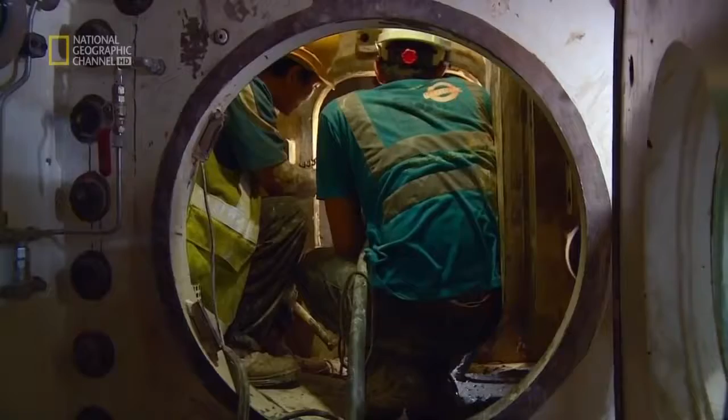Contractors of a shopping mall adjoining the street have left steel wires known as ground anchors in place, and these are bang in the path of the TBM. Put into the ground as temporary supports for the basements, they could hold up work for months.

It's very difficult to find them from the surface, and you cannot remove them from the basement anymore because the permanent walls are built. They are all covered.

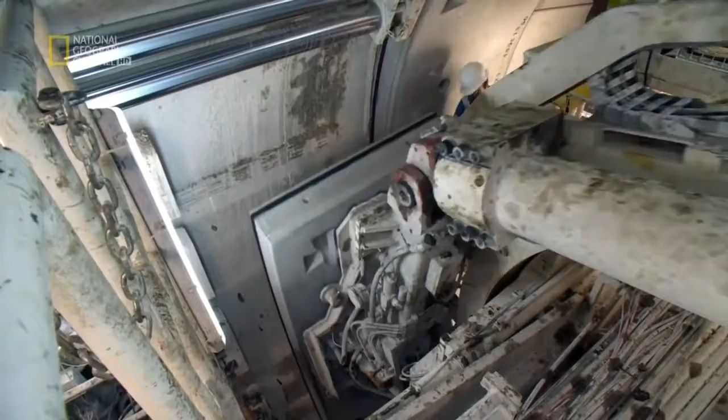Since the steel wires cannot be extracted, a decision is made to push on through with the TBM. But there is a continuous risk that the drill head may become entangled and damaged in the wires.

It is the task of engineer Hugh Wei Hon to monitor the tunnel ahead. So in the morning, actually, we found some ground anchors dropped underneath the conveyor belt, and we decided to stop the TBM, look for the ground anchors, cut it, and remove it.

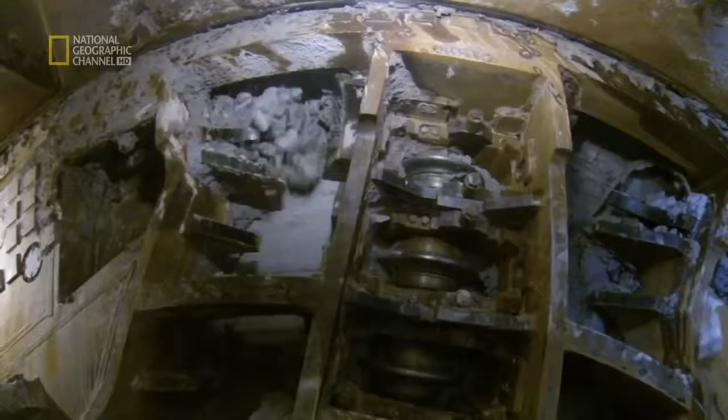A team now has to enter the space around the cutter head at the front of the TBM. There's little space to maneuver, and temperatures are close to 40 degrees Celsius.

To overcome this tangle, first the team washes away earth from the cutter, exposing the snarl of steel wires caught in the cutter head. These must be cut away with an oxyacetylene torch. It's a laborious process.

Every time they hit the ground anchors, the TBM halts as the wires are trimmed away. It takes two weeks to mine through this web, but it could have been worse.

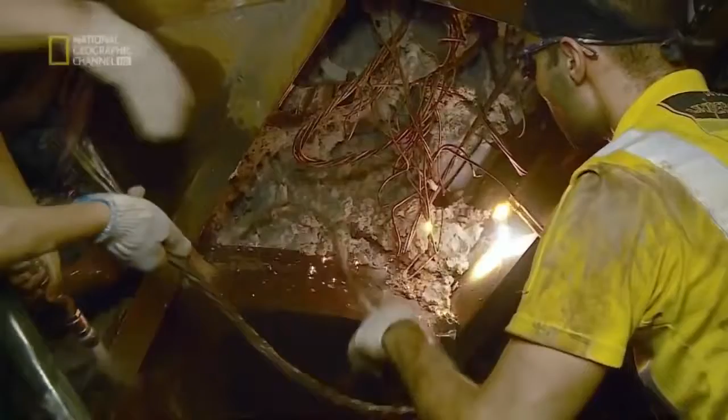If we had hit all the ground anchors that we expected, it would have delayed the project by about three to four months. And we were able to go down and cut these ropes so that they weren't stopping the cutter head from turning, and we carried on.

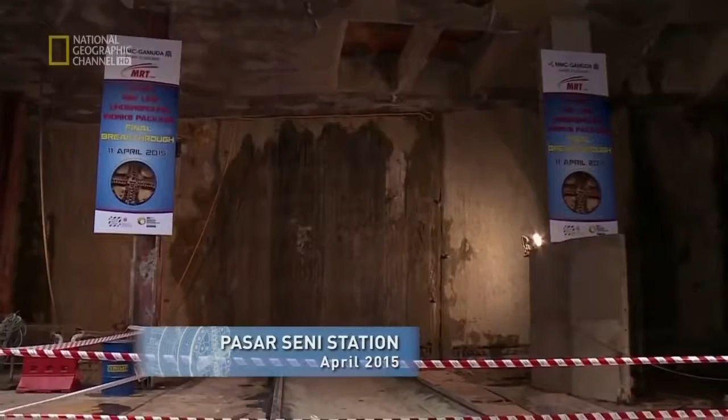It's the final breakthrough. After 23 months of excavation, from tomorrow the TBM will fall silent.

The honor goes to TBM 774. This was the first TBM to be launched into the limestone labyrinth under Kuala Lumpur. It has burrowed its way through almost 5 torturous kilometers of rock and soil. Now it must make the final breakthrough.

It's a thrilling day for the engineers inside the giant machine. We are about to break through. We have about 400 mm left on the cut. Hopefully we'll get a successful breakthrough.

What's happening now is we're cutting the D-wall, so that's basically the barrier between us and open air. So this is a very exciting moment for us. Any moment now, maybe within the next half an hour, we'll be out in the station.

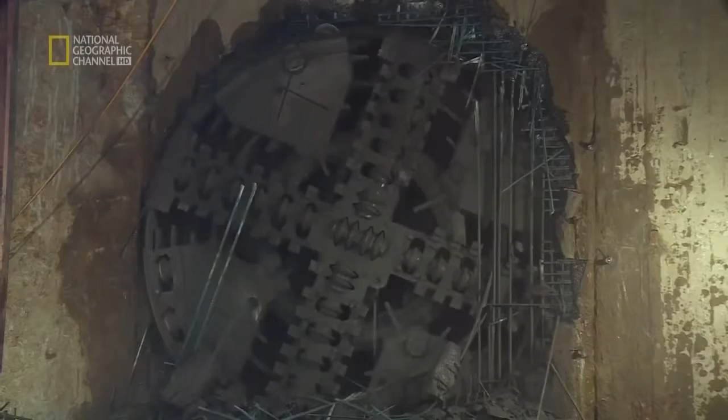This is actually the first TBM that we launched back in 2013. In less than 2 years, just short of 2 years, we have done 20 kilometers of tunneling. This is a great day for me and for the whole team.

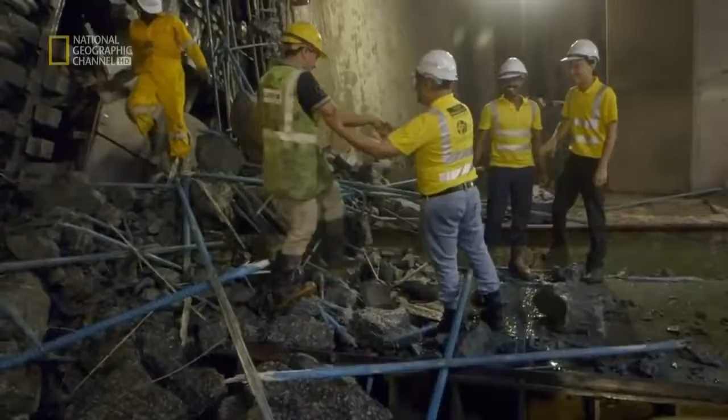Just weeks ago, MMC Gamuda won the Technical Innovation of the Year award for the variable density TBM in the United Kingdom. It's the biggest development in TBM technology in the last 25 to 30 years. So we have witnessed something new in this business. These are the most versatile machines existent at the moment. This is the future.

The last breakthrough is a landmark moment. Now the race is on to complete the stations and get the MRT running. Only then can Kuala Lumpur's clogged up traffic arteries become truly open for business.

You're basically going to live in a modern metropolis of the 21st century. This is the new world that the people of Greater Kuala Lumpur can look forward to: a city seamlessly integrated by overground and underground MRT lines, linking together the city's heart and its far-flung suburbs, where today's gridlock is a distant memory.